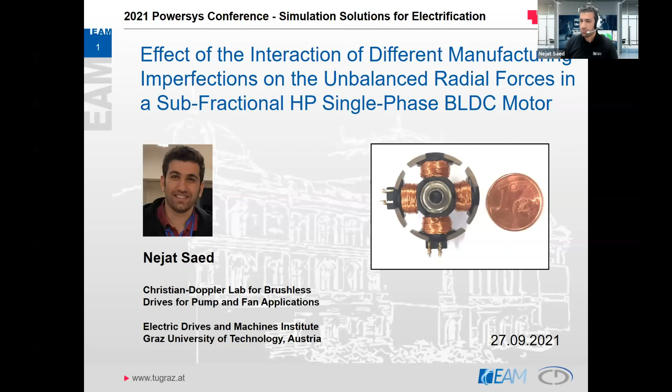My name is Nejat Saed, and the title of my presentation is Effect of the Interaction of Different Manufacturing Imperfections on the Unbalanced Radial Forces in a Sub-fractional Horsepower Single-Phase BLDC Motor. I would like to start with a short introduction about these small machines, and I will briefly talk about manufacturing imperfections and their effect on noise and vibration. Afterward, I will present my simulation results with JMAG, including single effect analysis of manufacturing imperfections and also their combination. And in the next step, I will show you some experimental results, and I will end with a conclusion.

Okay, let's start with an introduction. When it comes to cars, there are two trends. Cars are becoming more and more quiet, no doubt, and the number of auxiliary drives is increasing in modern electric vehicles in many applications. For example, in a mid-size modern electric car, there are more than 100 small electric drives, mostly in safety and comfort applications. And given these two trends, we can say that the noise of auxiliary drives is no longer masked

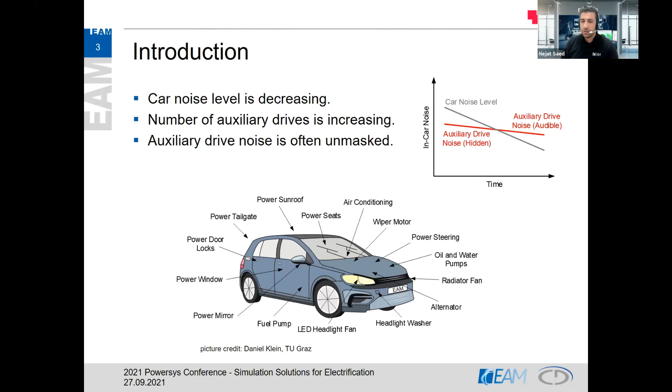by the noise of the internal combustion engine, and they can be disturbing, especially in applications that are close to the passenger. As a result, knowledge of noise sources in these auxiliary drives is important, as they can induce airborne and also structure-borne noise. In this presentation, we are talking about mass-produced sub-fractional horsepower BLDC machines in the range of 1 watt. The application that we are focusing on is an automotive cooling fan, which can, for example, be used in an LED headlight. And you can see this small fan here on the left-hand side.

In mass production of these auxiliary drives, minimum cost is often still the primary design criterion, as long as their functionality is not compromised. That means that they are often single-phase instead of three-phase motors, leading to fluctuating power and torque. And typically they have high cogging torque and torque ripple due to the same number of slots and poles, and it can be a source of noise. Also, due to their low-cost production, they have rather large manufacturing imperfections, which can be

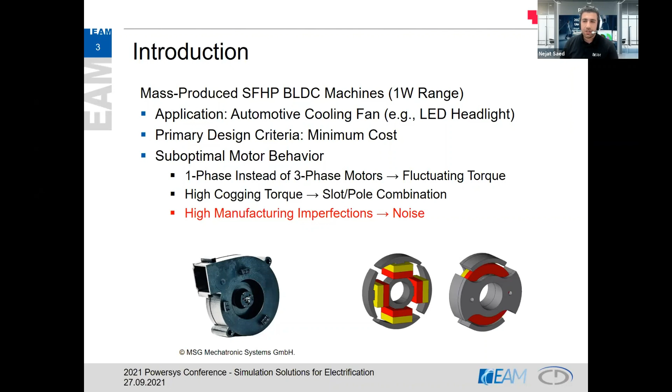another source of noise. As I mentioned, most of these drives are single-phase machines, and in this fan structure we have an outer rotor BLDC motor. In most cases they are salient pole motors, like illustrated here, and in some cases they are claw pole motors, as shown here on the right-hand side. The example case that we simulate is a 4-pole 4-slot outer rotor BLDC salient pole machine. So the target is to investigate the unbalanced radial forces under the situation in which there are several manufacturing imperfections, to see their interaction and their effect on noise and vibration eventually.

Okay, let's start with a brief introduction about manufacturing imperfections. Literature shows that these 3 manufacturing imperfections have a significant effect on unbalanced magnetic forces, including dynamic and static eccentricities and non-uniform magnetization. As you know, eccentricities have their origin in the misaligned centers of the rotor and stator, and they differ in the center of rotation. In the case of static eccentricity, the rotor rotates around its own center, and in dynamic eccentricity, it rotates around the stator center. So eccentricities make an uneven air gap. It means in some parts the air gap is smaller, and in some other parts it's larger.

Here in these 2 short videos, I want to show you how they behave. The smaller air gap is marked here by this red marker. For example, in the dynamic eccentricity, when the rotor rotates, the smaller air gap is rotating as well with the rotor rotation. But in the static eccentricity case, it's stable at a specific position, which is the initial angle of eccentricity. This difference makes their unbalanced radial forces different, which I will talk about in the next few slides. And non-uniform magnetization, which is rather common in low-cost applications, is defined here as a difference between the residual flux density of different poles, which is shown here in this right-hand side figure.

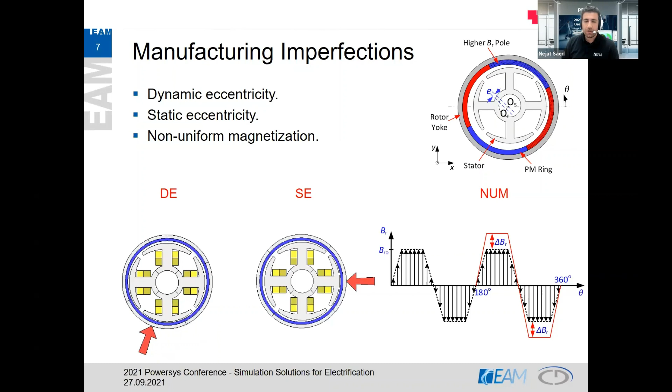Okay, here you can see how we can implement eccentricity and non-uniform magnetization in JMAG. It's quite easy. In rotation setting, you can easily implement any kind of eccentricity that you want. And for non-uniform magnetization, we can define different residual flux density in magnet properties, and we can define any of poles and define a different residual flux density for them.

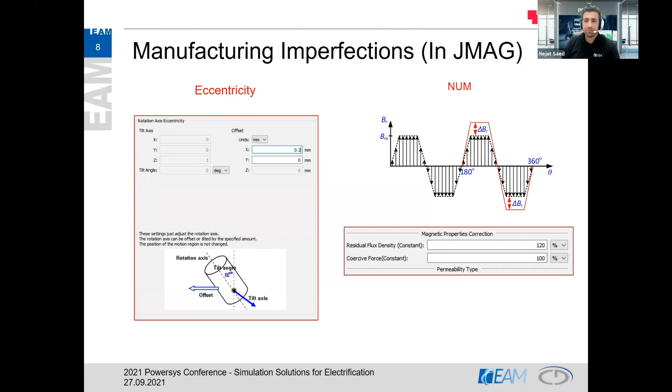Okay, let's go to simulation result. This slide shows unbalanced radial forces generated by static eccentricity and dynamic eccentricity. Besides the relative eccentricity, which is shown by delta, another parameter which is important to be considered is the initial angle of these eccentricities, which is shown by beta in these 2 diagrams.

The resultant unbalanced magnetic force in X and Y direction and the amplitude and phase of radial one are illustrated in these figures. You can see also the resultant force in Cartesian coordination look different, but the radial one are quite similar in terms of waveform shape and also amplitude. But the big difference between these 2 cases is the phase of the unbalanced radial force.

In static eccentricity case, it's stable, and it shows us that the resultant force vector doesn't rotate. But in dynamic eccentricity, it's rotating, and it's easily distinguishable with the phase of radial force vector.

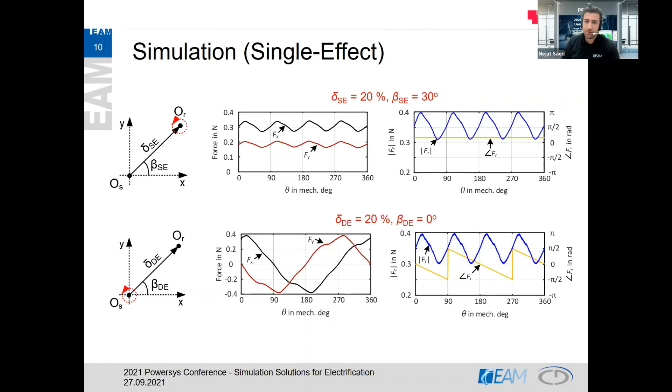And here, similar to eccentricities, we can define an angle for non-uniform magnetization, which is defined as the angle of the middle of pole pair with the higher residual flux density, which is shown here by this dashed line in the left-hand side. And in this case as well, you can see the X and Y forces, which are similar to dynamic eccentricity because their main harmonic is first harmonic, and there is phase difference between X and Y forces. But again, the radial force is similar to dynamic eccentricity and static eccentricity.

And in this case as well, the resultant force vector is rotating like dynamic eccentricity. It shows us that non-uniform magnetization and dynamic eccentricity have a quite similar behavior, and it was the main motivation to investigate their combination to see what happened if we have these two at the same time.

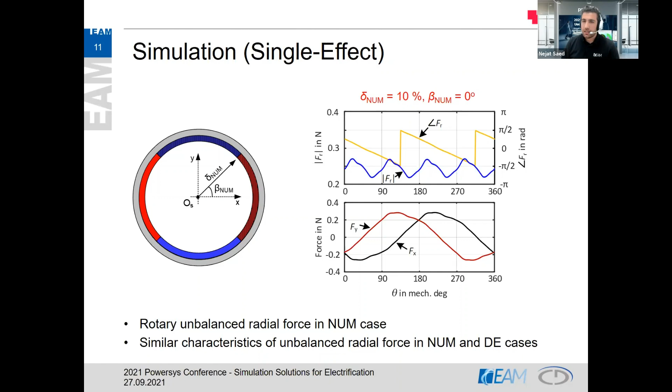Here now we can go ahead and compare the harmonic content of the resultant radial magnetic force of these manufacturing imperfections. As shown in this figure, all of these three have similar harmonic content, which is multiples of four harmonic, including zeroth, fourth, eighth, and so on. And the difference between their amplitude is related to the difference of the relative eccentricity and non-uniform magnetization.

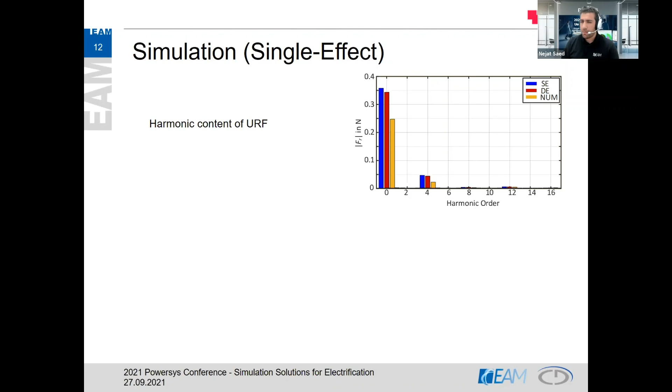So to see the difference between the harmonic content of these unbalanced magnetic forces, a two-dimensional fast Fourier transform can be implemented on radial magnetic force density, which includes several traveling waves, and each traveling wave has a time harmonic order n, which you can see in the equation, and spatial one, which is r in the equation.

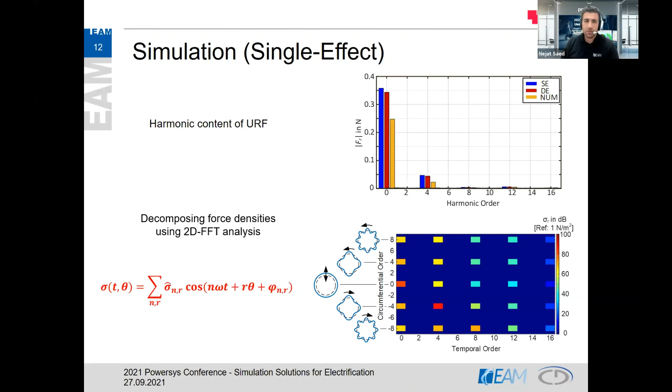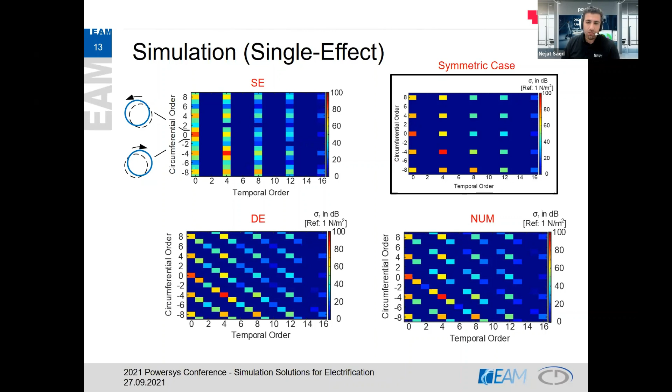Okay, we can now go to the combination of manufacturing imperfections. Before starting their combination, it's important to have a simple model of them to know in which situation dynamic eccentricity and non-uniform magnetization can cancel themselves out, and how much of relative eccentricity and relative non-uniform magnetization do we need.

In this simple model, these forces can be presented by subtracting the maximum and minimum forces which happen at the minimum and maximum air gap lengths. If we do some simple math, neglecting saturation and MMF drop in iron parts, we can have an equation for the maximum force for dynamic eccentricity as it's shown here, and a similar one for non-uniform magnetization as well.

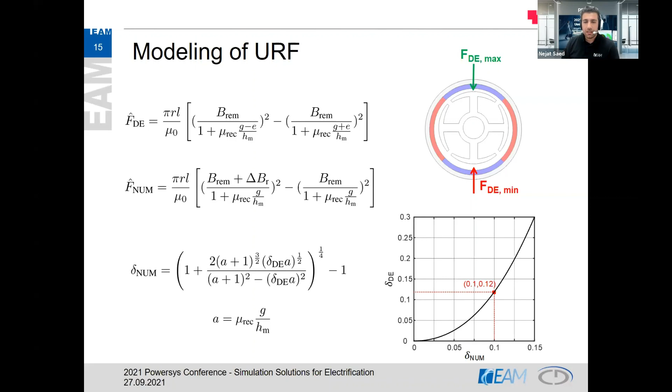And if we make them equal, it will lead to this equation, which shows us the relationship between non-uniform magnetization and dynamic eccentricity. And if we plot it here in this figure, you can see, for example, for 10% of non-uniform magnetization, we will need 12% of dynamic eccentricity to cancel out the force of non-uniform magnetization.

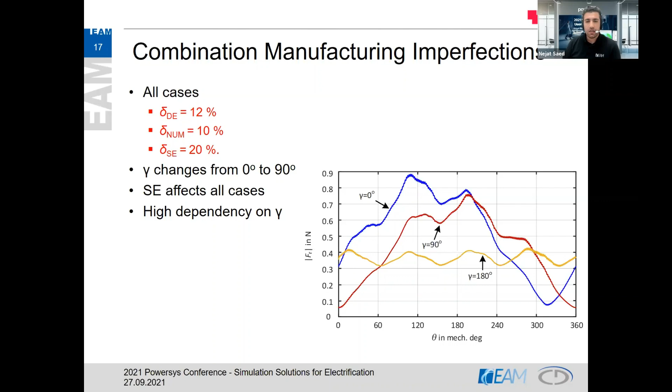The amplitude of this wave is 46 decibels, and when we decrease the gamma, it increases. For example, for gamma equal to 90 degrees, we have 69, and in the worst case, it could be 72. Here again, we could see the high variation of unbalanced radial force from 46 to 72, which is a really huge variation of unbalanced magnetic force.

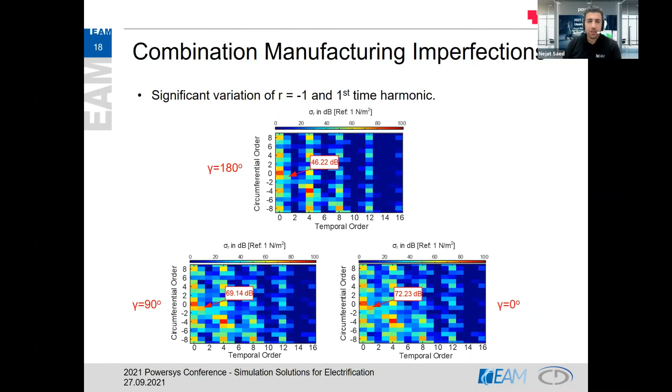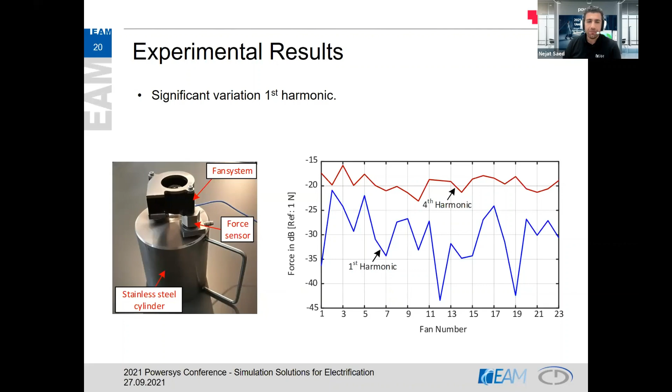And again, we can see the significant variation of the amplitude of the force first harmonic from almost -20 decibels to 45, which is a very huge variation of this first harmonic. And now we can say that these combinations can lead to uncertain structure-borne noise behavior of these small drives.

And let's come to an end with a conclusion. We say that manufacturing imperfections are rather large in mass-produced low-cost small drives, which can lead to noise and vibration. And the effect of the combination of manufacturing imperfections and the formation of radial magnetic forces have been studied using finite element analysis. And it has been shown that both dynamic eccentricity and non-uniform magnetization can cancel themselves out in some cases, and the amplitude of the resultant unbalanced radial force highly depends on their phase difference.

And this parameter increases the uncertainty of NVH behavior of sub-fractional horsepower BLDC drives.

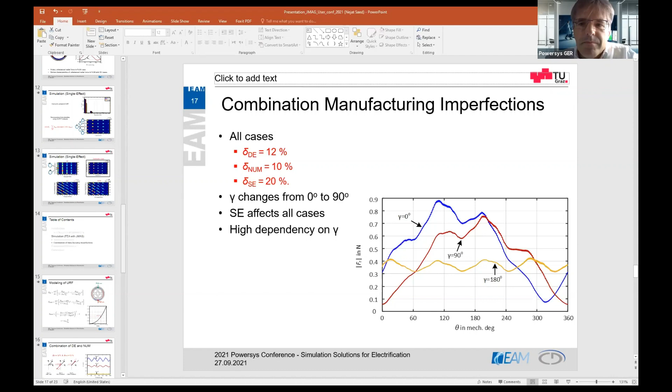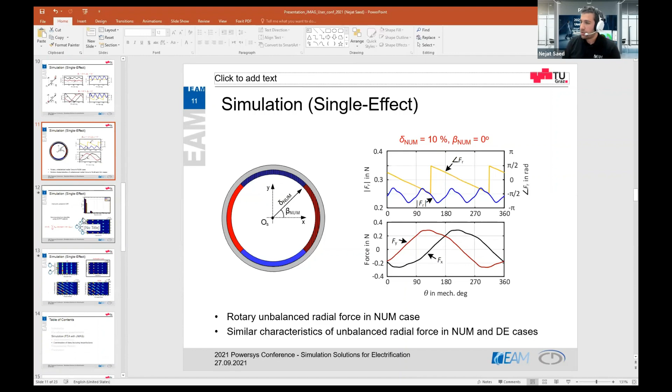If I got the question correctly, let me repeat it: What do you think about the effect of magnet positioning and geometrical tolerances in this kind of study? Yes, magnet positioning highly depends, in this case we have a magnet ring, on the initial position of the magnet and the center of stator and rotor. And it was the main parameter that we have investigated here as gamma, which is the phase or angle difference between this non-uniform magnetization and the eccentric center of rotor and stator. I hope I could answer the question.